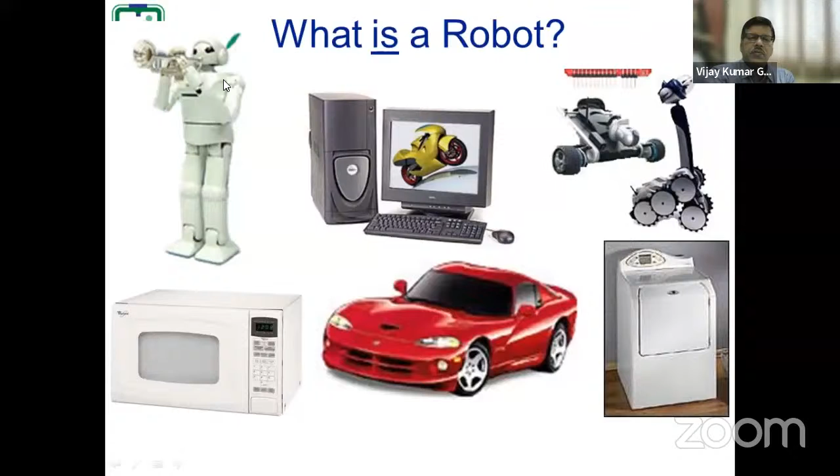So what is a robot? Basically, according to the Robot Institute of America, a robot was first defined in terms of the industrial manipulator. A robot, basically the industrial robot, is a reprogrammable multifunctional manipulator. So this definition has its focus on the manipulator.

But if we look at today's robotics world, the manipulator is a very small part, and robots have been developed in various other directions. But still the definition may be extended to the other robots. So this robot is reprogrammable. We need the robot to be able to perform different tasks. We should be able to reprogram it.

Maybe I have an arm which is working. For example, I've shown you this arm. I may be using it for pick and place: I pick something and I place it in another place. It can be used for writing on the board. It can also be used for welding. It can be used for painting, and many other tasks. So that means for every task we have to reprogram it. So we require a reprogrammable facility in the robot.

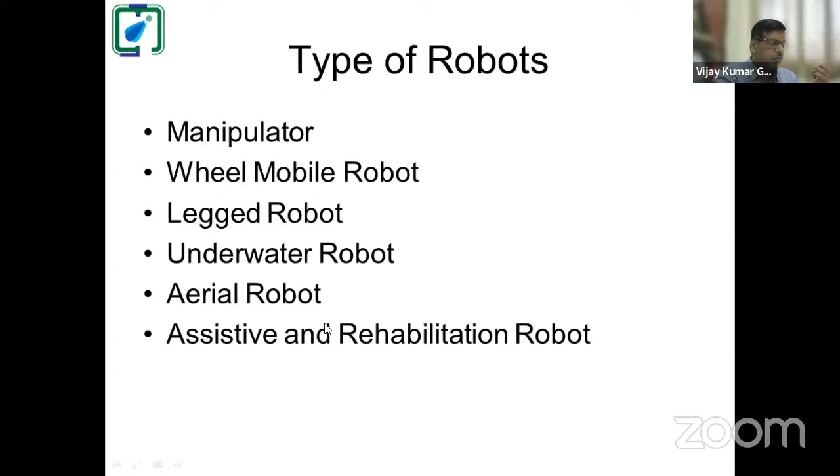Then what are the types of robots? I've just given you some indicative things, but we can have many more types. Basically, we can have the manipulator. You might have heard about the wheel mobile robots, the leg robots, underwater robots, aerial robots, or human-centric robots like assistive, rehabilitation, and other purpose.

So we can have the mobile robots. Mobile robots means robots that can move freely in their environment. So they can be either leg mobile robot or wheel mobile robot. We can divide it into two parts, right? Then we can subdivide it into the type of terrains, means whether they are moving inside an indoor room only, or they are moving outside the building, also outdoor robots.

Terrain robots, you might have seen that the Mars robot is moving in different types of terrain. So the Mars rover has been developed for different terrains. Terrain means that there is an interaction between the wheel and the soil, and the type of interaction may be different. Maybe the friction conditions are different, or there may be some other conditions which may be different. So we require different types of handling of the robots. Basically, the power requirement will be changing, or the balancing of the robots will be changing.

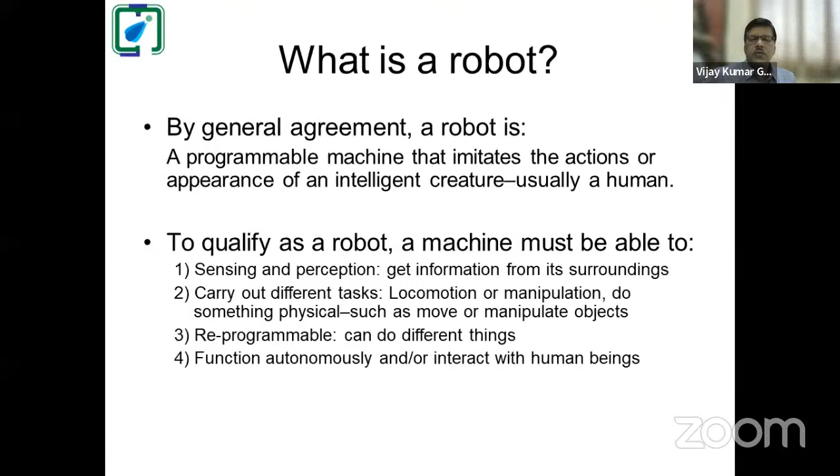The second type of robots are the manipulators. So we say that they are the robotic arms. Mostly they are stationary robots. So there is a base over which these robotic arms are placed. Now there may be some robots which can be moving also. Suppose I have a wheel mobile robot and I can place an arm over there, and then it can go to a certain place and carry out certain tasks.

Particularly when we have rescue operations, such types of robots may be useful because we have to move to the other place. We have to move in different terrains because there may be boulders, there may be some other type of terrains. So we have to move it, and then it is carrying the arm. Just like our scavengers, they will be removing the debris, and then they will be trying to identify the persons and other things, right? So we can have a combination of mobile and robotic arm also.

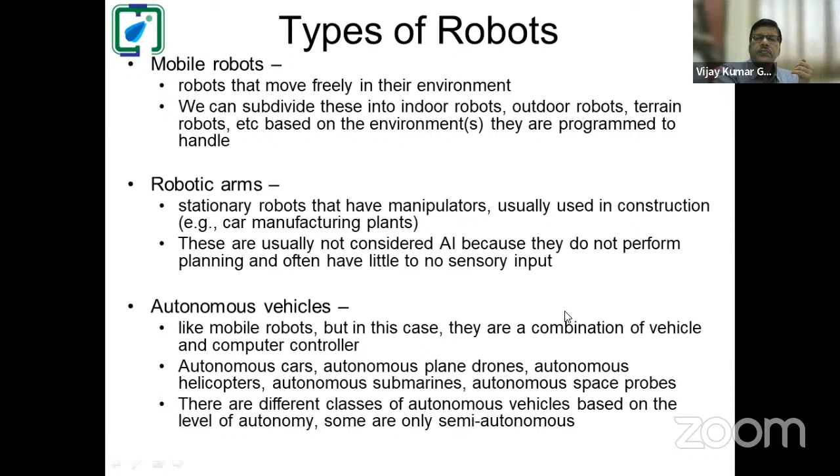Because with the human hand, when we are trying to pick something, we first determine whether we require a soft touch or a hard touch. If I want to pick up cotton, obviously I don't require much pressure. I have to pick it slightly. Only a small force will do the job. But if I have to pick up this remote, obviously I have to apply more pressure. So another direction soft robotics is going in is trying to mimic the skins of various creatures and then develop robots, right?

There are robots which learn by mimicking, like facial gestures or other types of learning, and they can be used. Another type is software agents. They work in the network, basically. This is another direction. It is not the hardware direction, only the software direction, where the bots, these software agents, move in the network. They try to determine where the problem in the network is, and they are used for other purposes.

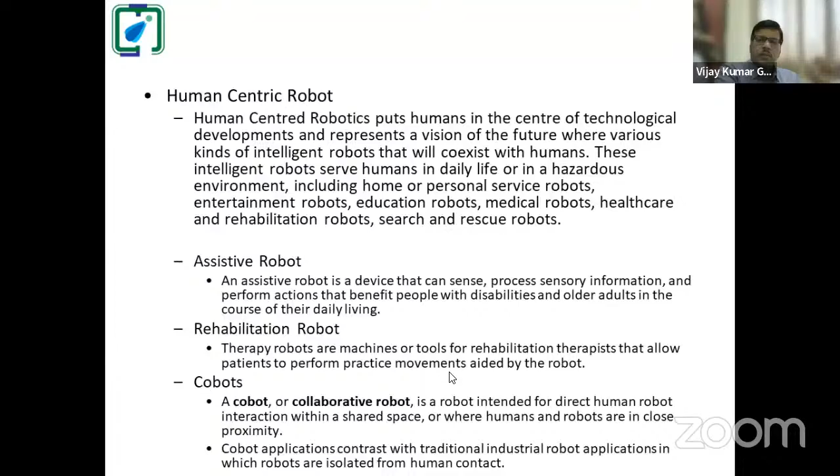And I already talked about the cobots. A cobot is a collaborative robot which works in collaboration with the human within a shared space. So these are some of the robots being developed in the world, right? So with this brief introduction about robotics, what I am trying to do is give you some small information related to manipulators and mobile robots.

Why I had chosen the manipulator for this is basically that the human arm or these therapist robots are being developed based on these robots. We can have robots which have an open chain, so they are serial manipulators, or there may be parallel manipulators, where the various actuators are in parallel to each other. So let us first take the manipulator.

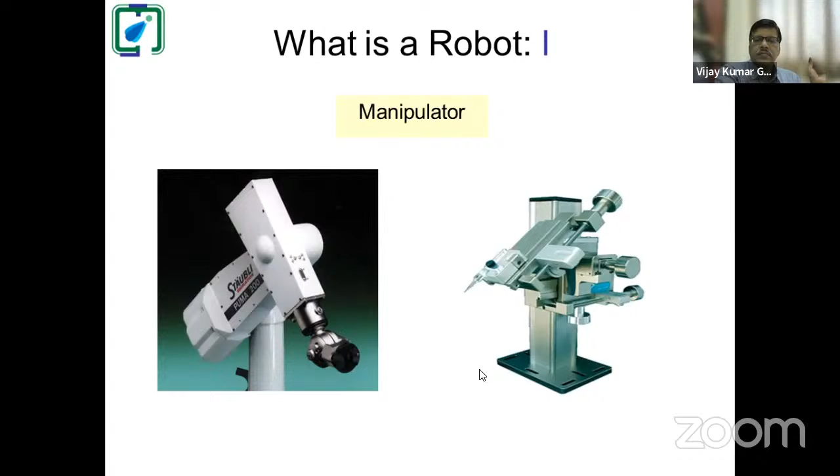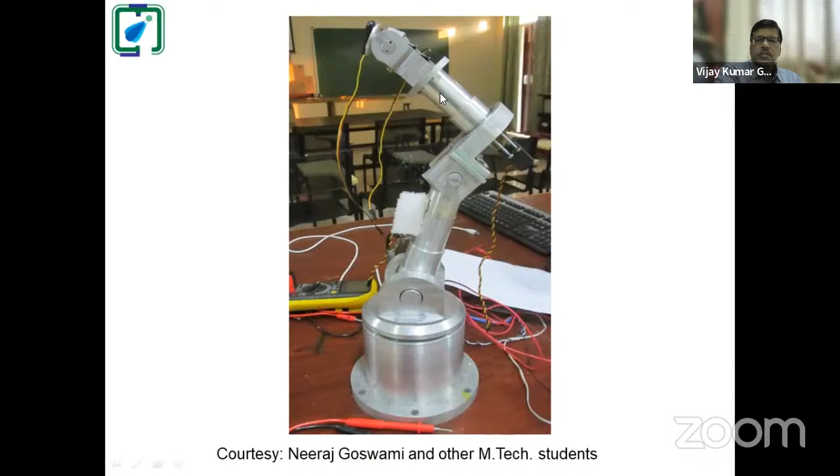This is the Puma 200 robot. I had already told that there is a shoulder joint, there is an elbow joint, and there is a wrist. What a human being can do is right there in this robot also. This is another robot which is developed for performing a specific task. In our lab also, we have tried to develop a robot manipulator like this, which is a 6 degree of freedom robot. So this is the arm, and these are the various joints.

So when we talk about the robot, the initial robots were based on the manipulator. Accordingly, the robot coordinates have been defined, and the robot classification. Now mobile and other robots have come, but still these definitions are told because these are the initial things. So we can have robots performing the operation just like a crane or gantry, where all the joints are prismatic joints. Manipulators either have prismatic joints or rotary joints.

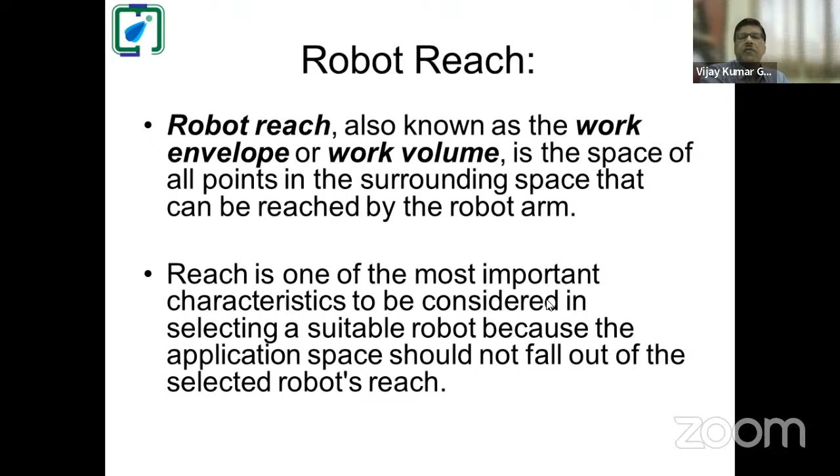Reach is one of the most important characteristics to consider in selecting a suitable robot, because until it can reach a particular point, we cannot perform that task. For different robot configurations: Cartesian, the reach is a rectangular space. Cylindrical, it is a hollow cylinder. Polar or spherical, it is a hollow sphere. And jointed arm configuration does not have a specific shape.

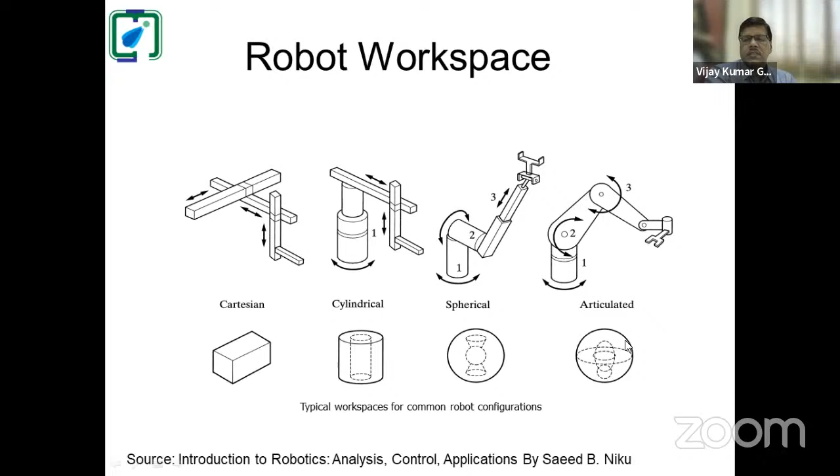This figure shows the robot workspace. This is the Cartesian workspace, this is the cylindrical workspace, this is the spherical workspace, and this is the articulated workspace.

When we discuss the manipulator, we discuss its kinematics, which can be divided into two parts: forward kinematics and inverse kinematics. This is one example of a manipulator. If I rotate it about this vertical axis, this point will move in this space. We know the trigonometric relations, so if I move by one angle, it moves by r cos theta and r sin theta. That gives me the new position based on theta.

But there is another degree of movement here; the robot can also move about this axis. Now it becomes a combination of two angles, theta and phi. If I have another one, psi, then I have a third degree of freedom. So given these joint movements, calculating the final position is given by forward kinematics. It is simple in 2D space, but in 3D space it becomes slightly difficult.

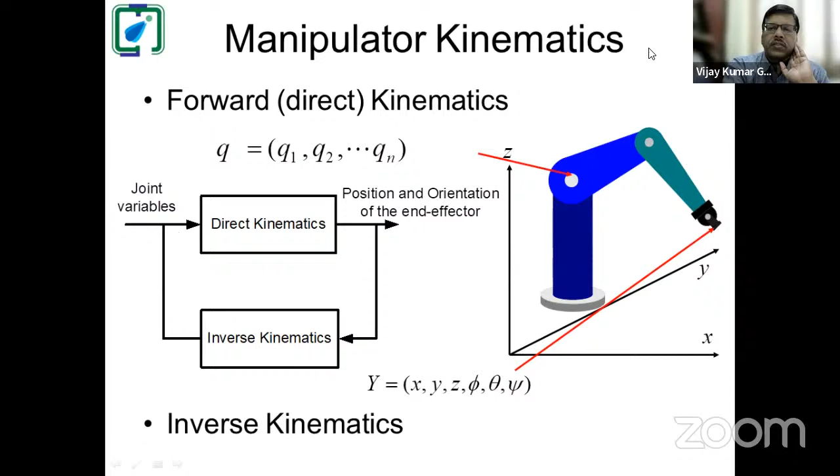Right? So just to brief, basically for forward kinematics, we use the Denavit-Hartenberg conventions. This convention is based on how the joints are joined together. So suppose I have this one link, this may be the other link, this joint may be in this direction and this joint may be in this direction. So what is the relationship as I move from this previous joint I-1 to the next joint I? What will be the relationship? Basically, we are moving along this.

So 4 parameters are being used for this purpose. They are given as A, alpha, D, and theta. So these 4 parameters define the movement, how from one axis to another axis I can move, or how from one link to another link I can move. There are basically 2 conventions for the Denavit-Hartenberg. One is the original Denavit-Hartenberg, and another is the modified Denavit-Hartenberg. So you have to be careful which one you are using. You cannot mix them together.

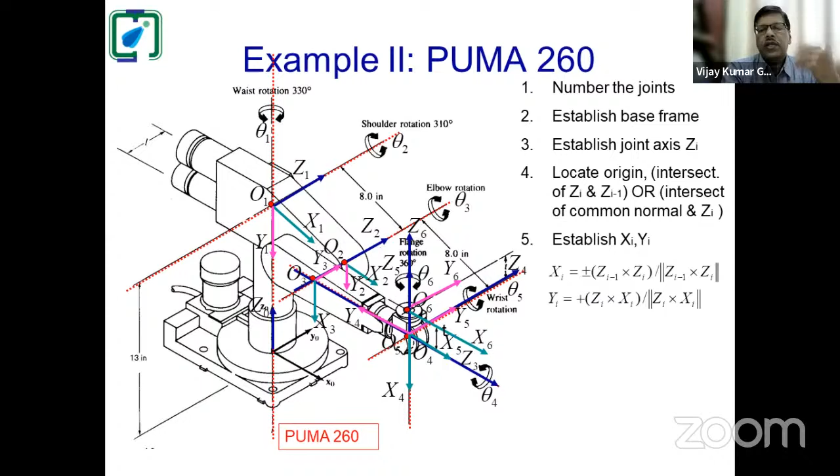Then we define the origins for different points. And once they are defined, we define the x-axis. So Z0 and Z1, perpendicular to both, x1 is defined, right? Then Z1 to Z2, as we move, the common perpendicular between the two will be the x2 axis. And likewise, you will be defining x3, x4, x5, x6. There is no need to consider the y-axis because the Denavit-Hartenberg rule does not incorporate the y parameters. So that becomes sometimes problematic actually.

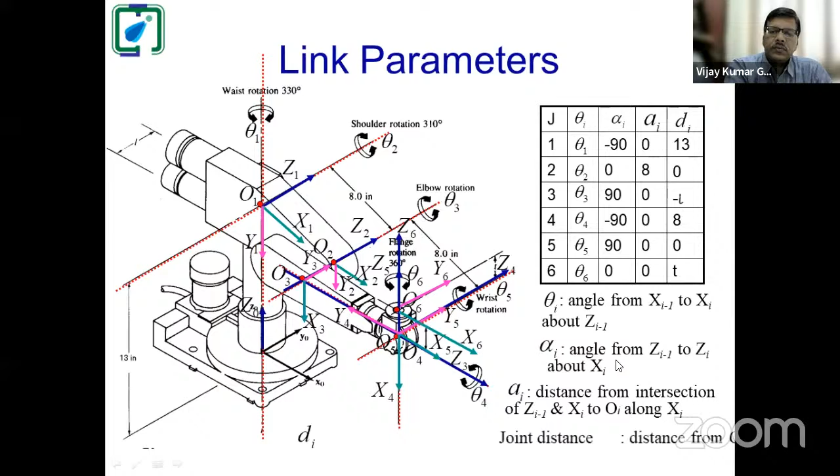So based on the Denavit-Hartenberg rules, this is the table which has been formed. It contains the 4 parameters theta, alpha, A, and D. In the conventional or original DH rule, theta and D are defined about the previous axis, I-1 axis, and alpha and A are defined about the new x-axis. While in the modified convention, alpha and A are defined about the previous x-axis, and theta and D are defined along the next Z axis. So this was just a brief of the forward kinematics.

In inverse kinematics, we try to identify what will be the movements, because when we try to move the robot from this place to this place, what will be the movement of the different joints? What will be the rotations? So for joint variables which can bring the robot to the desired configuration, inverse kinematics plays a role. But remember, inverse kinematics is slightly tricky because it gives you multiple answers. Even if I consider that only one link is moving, you may get 2 values of theta if theta is positive. If theta is negative, you will again have 2 values for theta. So with more axes, you will be getting multiple answers, and you have to choose the one which is best fitted.

There are techniques available for carrying out the inverse kinematics. I am not discussing that because it requires sufficient time.

Then the third thing which comes is the velocity kinematics, because when we move with the manipulators, the rotational speed or the speed of the end effector along different directions will be important. So velocity kinematics gives the relationship between the joint space velocity and task space. So these are the movement of the different axes velocities. Suppose first axis is moving with theta 1 dot, second axis is moving with theta 2 dot angular velocity, and

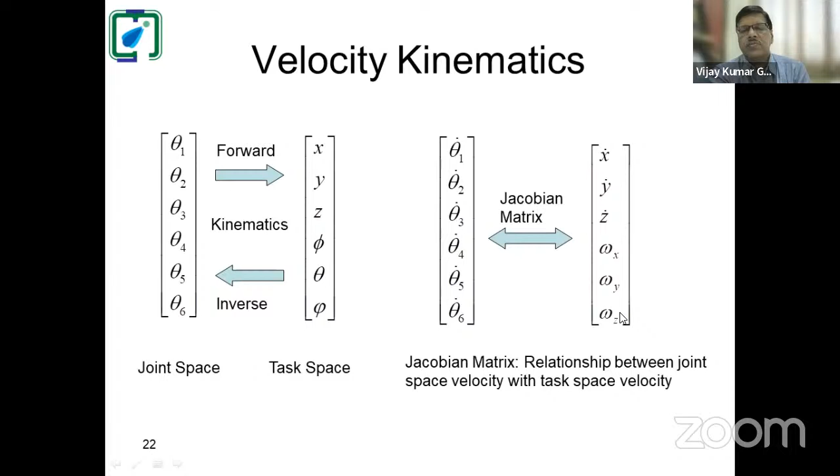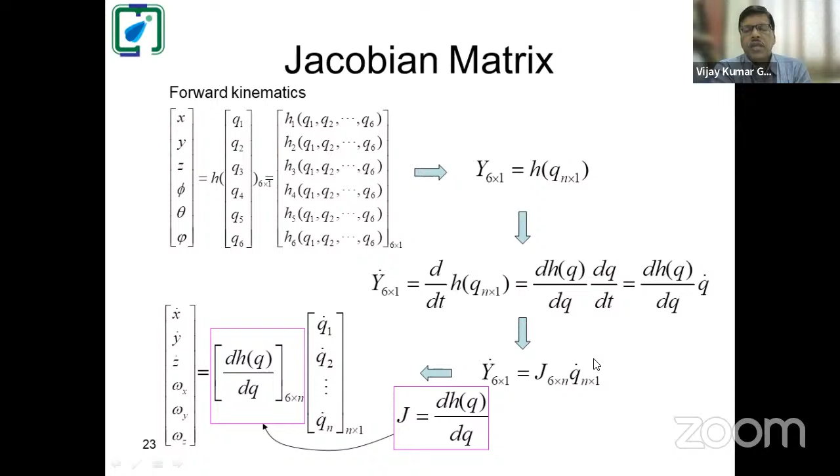likewise others. So what will be the velocity of the end effector along x-axis, along y-axis, along z-axis, or rotation about x-axis, rotational speed about y-axis, and rotational speed about z-axis. So this is how the Jacobian is defined. Again, I am not going into much details of that, but you get the matrix like this, and that gives you the relationship basically.

So that covers the forward kinematics, inverse kinematics, and this velocity kinematics. In addition, we perform the dynamics of the robot, in which we try to identify what will be the motor capacity, how to determine that the particular motor will be able to sustain the particular load. For example, suppose I am picking again this remote. It is having its weight. Maybe it is 100 gram or 150 gram or 200 gram. So when I pick it, I need to apply sufficient force or sufficient torque so that I will be able to pick it.

So when we are designing the robot or manipulator, even in the wheel mobile robot also, we have to identify what type of motor is needed, what will be the torque capacity of that, and accordingly we have to work on the design of the robot. Right? So that is the dynamics of the robot. So this was a brief introduction about the manipulators basically. Now let us move towards the mobile robot, some introduction to the mobile robots also.

So mobile robots, you can divide into two parts. One is the wheel mobile robot, another is the leg mobile robot. If we compare these mobile robots with the industrial robots, or the manipulator, generally the manipulator will be an open kinematic chain with the end effector. We have the base, and from base to the hand, this is not connected to any other part. So it is an open chain. While a wheel robot is a closed multiple chain because all the wheels are connected with each other through the ground. They are on the ground.

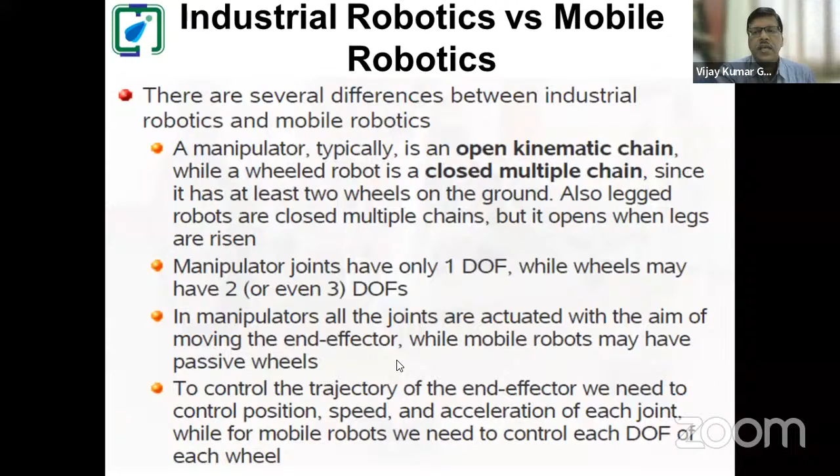So we use the numerical methods to solve such type of problems. It becomes more and more complex as the degree of freedom and complexity increases. So that is right. I will come back to this slightly later, or I will share some examples of this. Okay. So now we move forward.

I was just discussing the mobile robots, so how the mobile robots have been developed. If we see the creatures in the real world, they are moving. So there is a movement due to rotation. Wheels are the examples of that. So we can have the wheeled mobile robots. There may be a conveyor belt.

So tracked wheel mobile robots have been developed, particularly when the terrain is quite difficult; in that case, tracked wheels are better. Even if you go into the hilly areas during the snowfall, they use the tracked wheel base, right? And our armies anyway are using this tracked wheel. So conveyor is there. We can walk, we can swim.

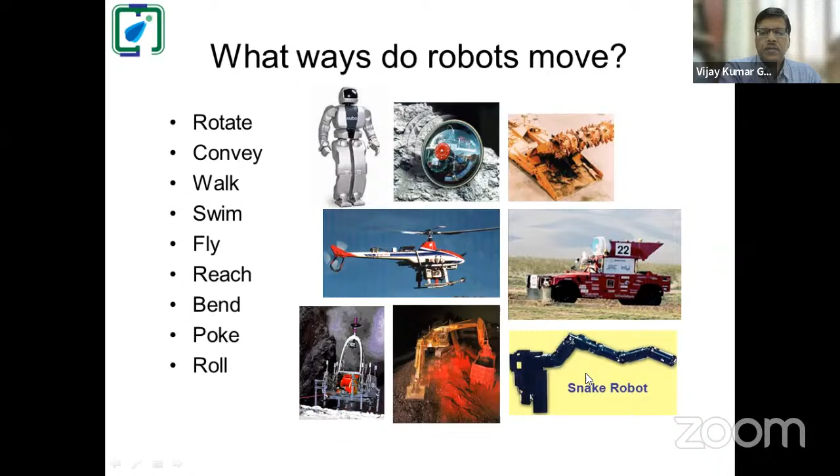So same thing has been tried to replicate in the robots. Fly, reach to a particular place, bend. Snake type of robots will be bending and then crawling, poking, rolling, right? So we can use the legs. They can be used for walking, crawling, climbing, jumping, and hopping. Wheels are used for rolling.

We can use the arms for swinging purpose. We can use them for crawling and climbing. This is one example. Arms are being used for moving, right? Then flippers can be used for swimming. And there are many other biological examples, right? And these become the effectors.

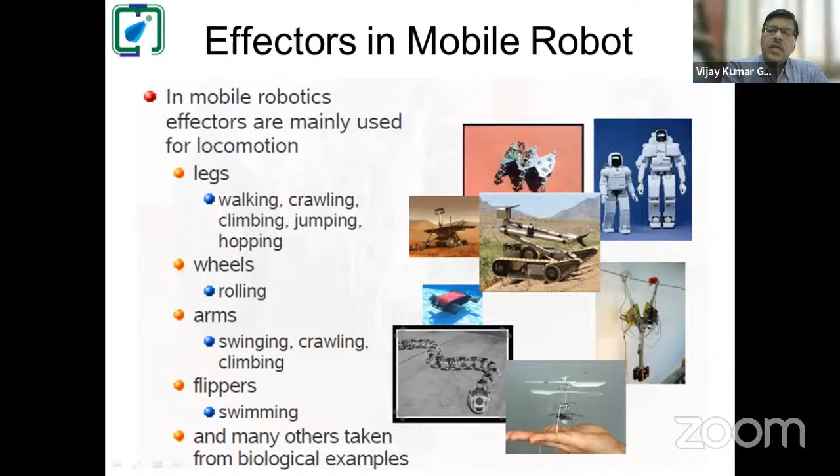So leg is one effector. If we see the leg, it is just a manipulator. If we invert the manipulator, it is a leg, right? Wheels, we use the motors. Arms and legs are a similar type. Flippers require an action like this so that swimming becomes easy. It can be this movement or different combinations. So by analyzing the movement of the creatures in the world, they have been designed by various researchers, right?

So if we talk about the legged robot, we have the locomotion. The basic purpose of the locomotion is to move the robot around. So the robot is performing two tasks. One, it is moving around, and then it is performing some other tasks. To move other objects around, that is manipulation. So for wheeled mobile robots we are just considering locomotion, and manipulators we had already discussed, right? So this I had already covered.

While most animals use legs to get around, legged locomotion is a very difficult robotic problem as compared to wheeled locomotion.

The main problem is balancing. As human beings, we are able to easily stand still. We can walk or we can just stay at a place. But if you see, when we are standing at a place, after some time we have to change our posture, right? Because we tend to get instability.

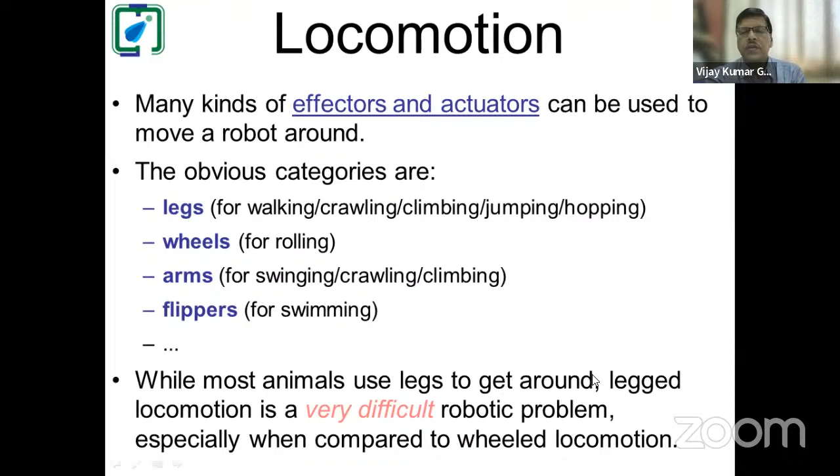So we have to change the posture, and again we stand. Basically, we keep on standing, but our posture will be continuously changing. So in robots also, it is needed that they should be stable. So it is like that, right?

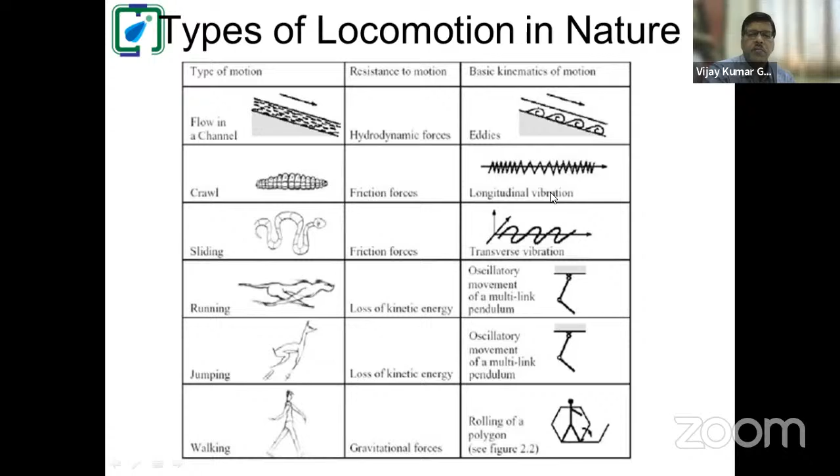So these are the types of locomotion in nature, and the kinematics of the motion explored by the researchers is like this. These basic mechanics principles have been used by the researchers to design robots like this. So for crawling, just like the inchworm, we can create longitudinal vibrations in the robot, and then it can move. For sliding, we require transverse vibrations, and like that, right?

So I had already discussed that for locomotion, any robot needs to be stable. We talk about two types of stability. One is static stability, meaning it just stands still without falling over. In dynamic stability, it is moving. And if you see, when you might have started riding the bicycle, static stability is difficult as compared to dynamic stability. Right?

So for static stability, we require enough legs or wheels on the robot to provide sufficient static points of support. When we are talking about mobile robots or legged robots, we ask what is the point of support, right? As a human being, when we stand still at a particular place, we have our legs. So if I draw them, I have this foot on the ground, this foot on the ground, and between them, they become the point of support.

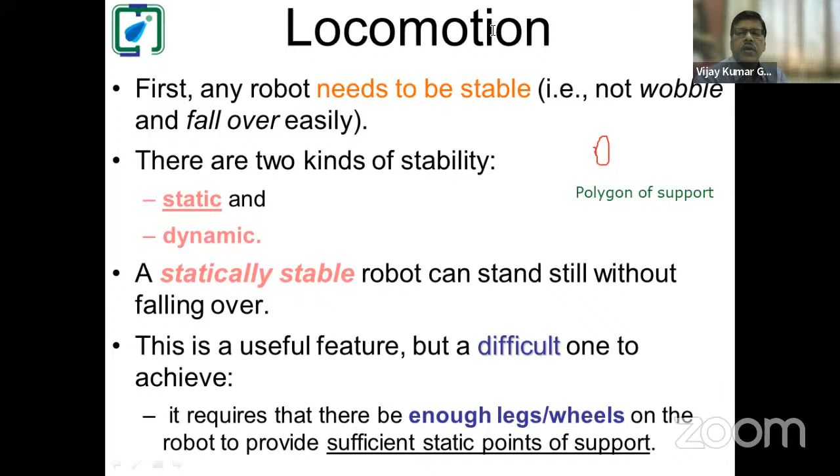Instead of point of support, because there are a number of points in this support, it is better to call it the polygon of support. So for static stability, our CG should always be within the polygon of support. That is the basic requirement. Obviously, when we have more legs, static stability becomes quite simple. Center of gravity must fall within the polygon of support.

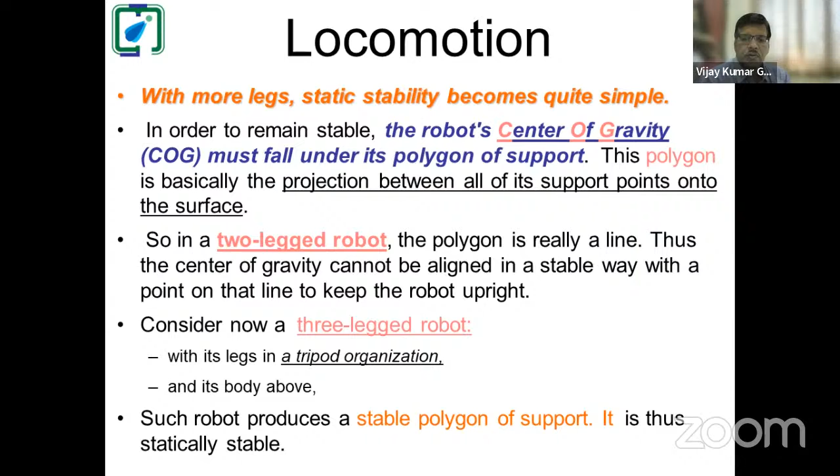So at least 3 legs are considered to be more stable because they make a tripod. A tripod is always stable as compared to the biped condition, with 2 legs on the ground. Okay. We require a minimum of 2 degrees of freedom to move a leg forward. We have to lift and we have to perform a swinging operation.

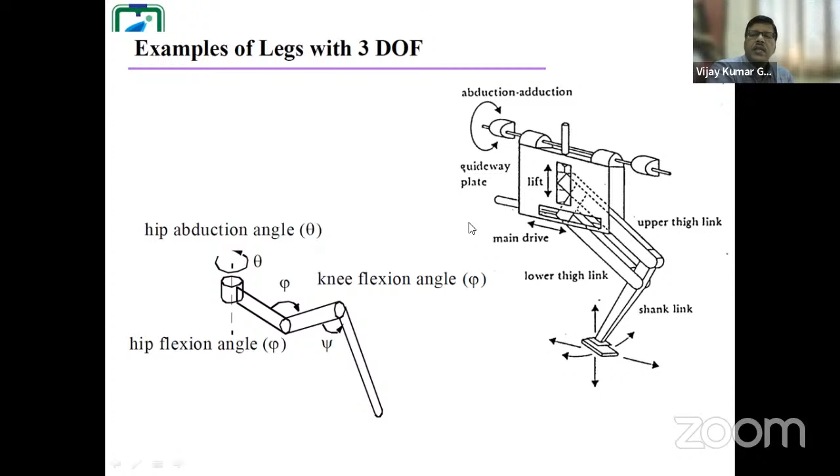3 degrees of freedom are required for each leg in most cases. And if we have a 4th degree of freedom for ankle support, it may improve the walking. But with 4 degrees of freedom, we increase the complexity of the design. Each leg can be considered as a manipulator. This is one example of leg support; you can see it is just like a manipulator. We have abduction, adduction, and guideway. Right?

Coming to wheeled mobile robots, we normally see them. A wheel assembly is required. Most robots use wheels for locomotion because of the simplicity of control and stability. Right? But if we see, animals do not have wheels; they have legs. Because nature has given animals stable performance, they can balance their body. That intelligence is already built into the animals.

With a legged robot, obviously we can overcome a number of obstacles. So for obstacle avoidance and other purposes, legged robots are considered better as compared to wheeled mobile robots. But if we require speed, wheeled mobile robots will have more speed as compared to legged mobile robots.

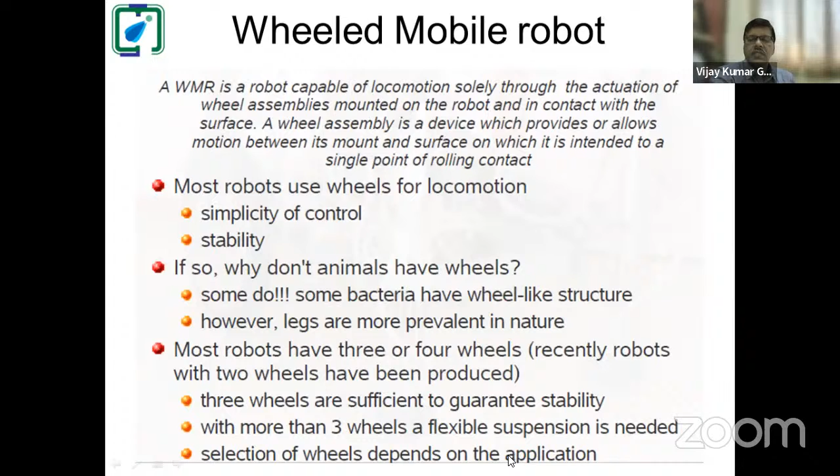So most robots have 3 to 4 wheels. 3 wheels are sufficient to guarantee the stability. With more than 3 wheels, a flexible suspension is needed. So it depends upon the type of applications.

So there are 4 basic types of wheels. Standard wheels we normally use. So there is a hinge here, and then it is wheels. Right? Castor wheels, which we use in our chairs. So there, the third wheel is automatically aligned. Right? It is just given this type of shape, so it is mostly aligned.

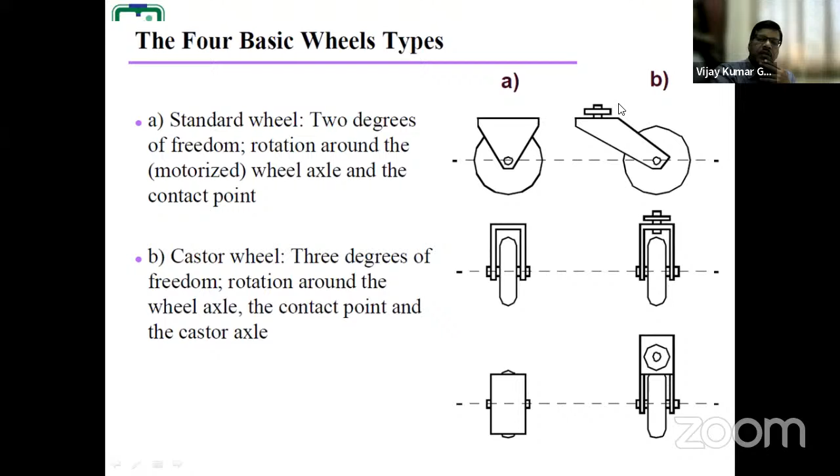Right? Then we have the Swedish wheel, which is having 3 degrees. Can rotate about their own axis. Around the rollers they can rotate, and then around the contact point they can move. We say that they are the omnidirectional wheels like this. Right? Swedish wheel with 45 degree, it is now known as the omnidirectional wheel. And instead of this wheel like this, you can have a roller here, then that becomes the ball or spherical wheels.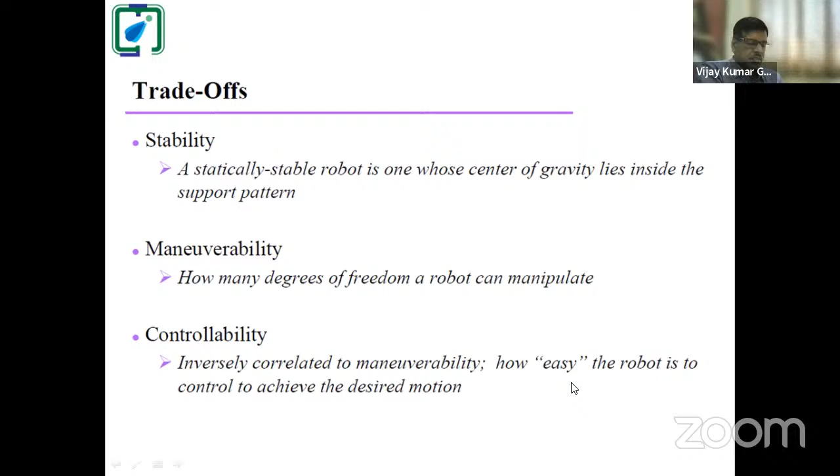The biggest advantage with the omnidirectional or Swedish wheel is that I can move this vehicle along the left direction, right direction, or I can move it front or back directions without any movement in the other directions. So that advantage we are having with this. Right? So basically, we have to have a trade-off between the stability, maneuverability, and controllability. Maneuverability means how many degrees of freedom a robot can manipulate at a time. Controllability means how many degrees we can control. Right?

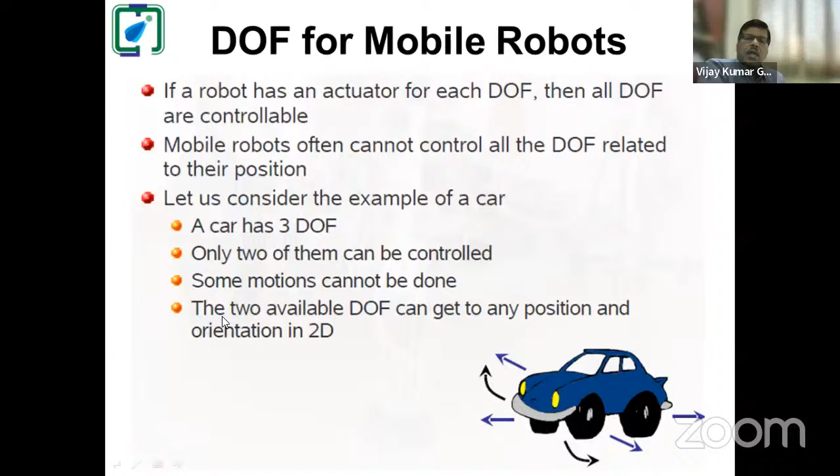For example, suppose this mobile robot, if we consider this car, it is having 3 degrees of freedom. It can move along front direction, it can move sideways, or it can steer. Right? But out of these 3, I can control only 2. One is the movement of these wheels, another is the steering. Right? So it is having 3 degrees of freedom, but we can use only 2. So that means some motion cannot be done, sideways motion cannot be done. Suppose I require this sideways motion, I have to take the car front and back a number of times, and then I can place it on the side. The 2 available degrees of freedom can get to any position and orientation in 2D.

So when we talk about the wheeled mobile robot, holonomicity is required. Holonomicity means whether the robot is holonomic or non-holonomic. If the number of controllable degrees of freedom is equal to the number of degrees of freedom of the robot, it is a holonomic robot. But if the number of controllable degrees of freedom is less than the number of degrees of freedom of the robot, it is a non-holonomic robot. And if the number of controllable degrees of freedom is larger than the number of degrees of freedom of the robot, it is a redundant robot. So a car is a non-holonomic robot, a human arm with more degrees of freedom, 7 degrees of freedom, is a redundant system, right? So I can skip this.

Another term which is generally used in the wheeled mobile robot is the maneuverability. It is basically the combination of the mobility available based on the sliding constraints and additional freedom contributed by the steering. So basically, we can say that degree of mobility is delta m, small m, remember here. Degree of steerability is suppose delta s. Then degree of robot maneuverability is delta capital M, that is equal to degree of mobility plus degree of steerability.

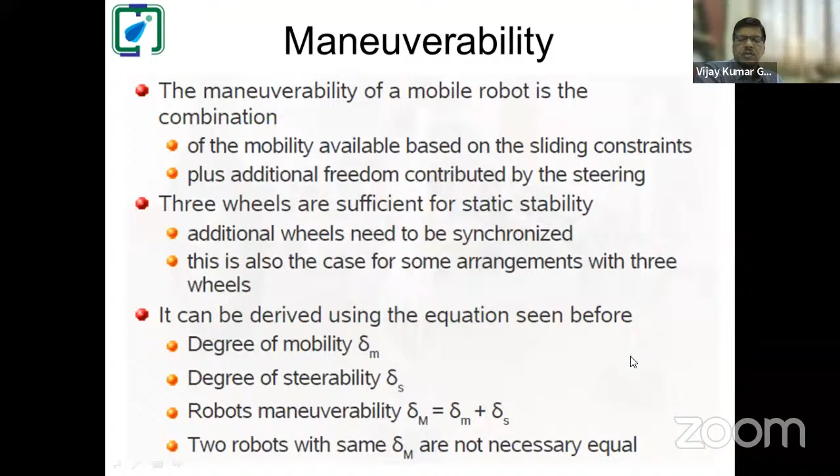I'm always inspired by Boston Dynamics actually. So I wanted to show you some video. Let me just play the video. I have, I think, 10 minutes time. So just.

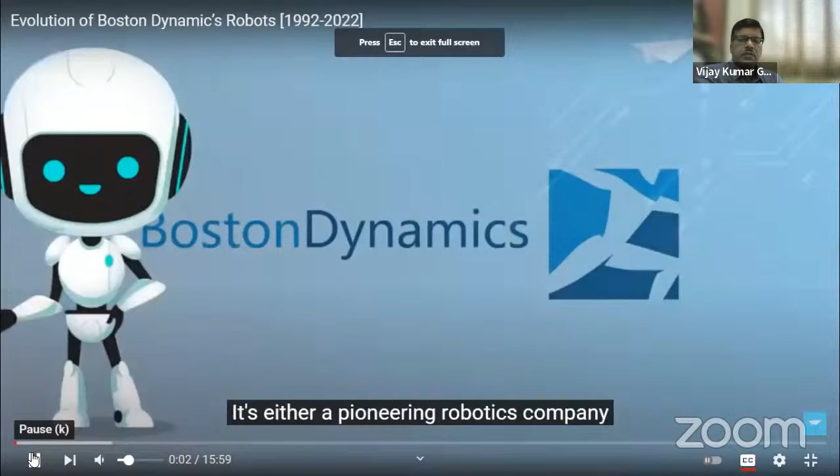So, Boston Dynamics, a pioneering robotics company helping to lead in a technological revolution, or a sign of the coming robot apocalypse? Over the last decade, Boston Dynamics has built some of the most impressive robots in the world that can run, jump, and even dance better than some of us humans. You can see this robot, it can move just like a human being on various types of terrain.

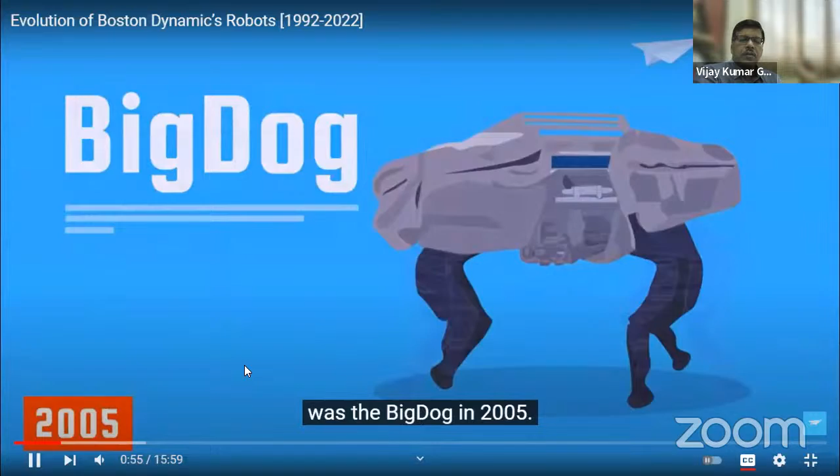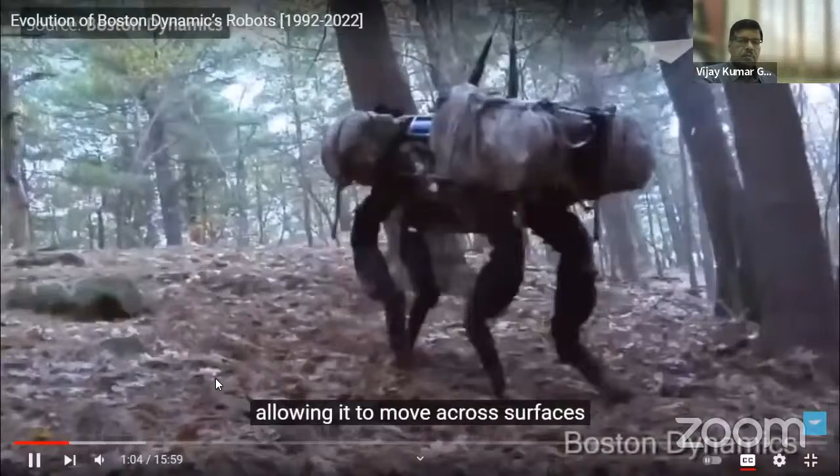One of the first Boston Dynamics robots was the Big Dog in 2005. The robot was designed to be able to carry heavy gear for soldiers in terrains too rough for vehicles. Instead of wheels, it had 4 legs, allowing it to move across surfaces that would defeat wheels. Big Dog was 3 feet long and stood 2.5 feet tall, making it about the size of a small mule.

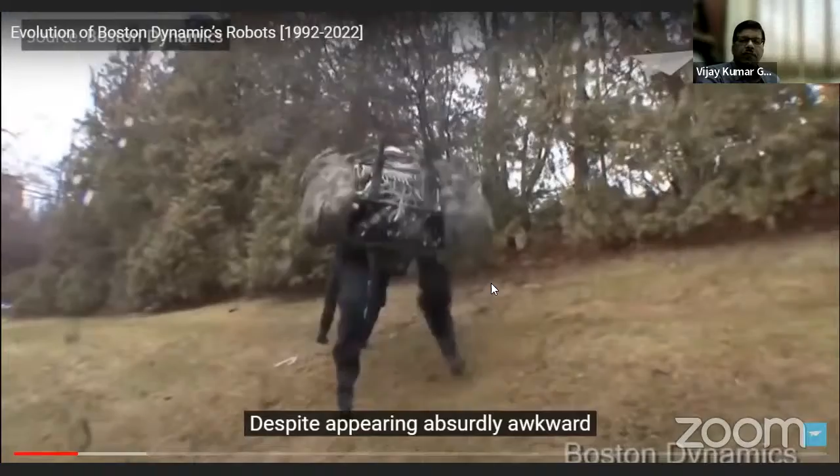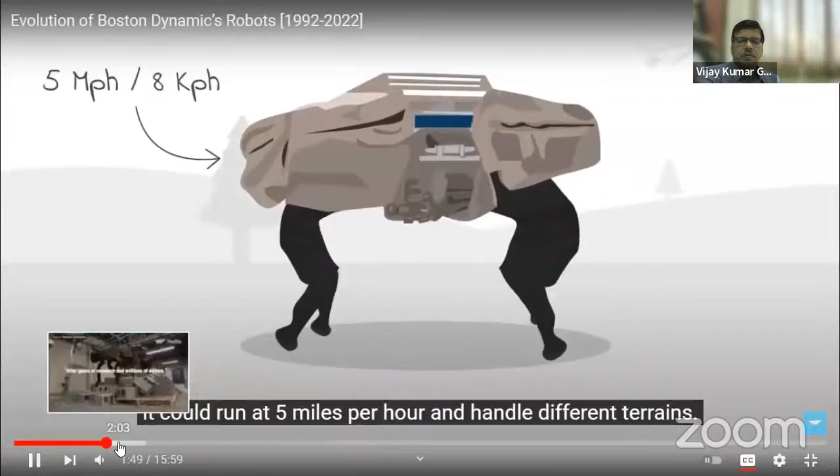The awkward and early videos of Big Dog were posted first on the Boston Dynamics YouTube channel. The robot was surprisingly proficient at keeping its legs under itself. Even when it was kicked by its tester, the Big Dog did not fall. In 2010, Big Dog was improved. It could run at 5 miles per hour and accurately reproduce two drunken men carrying a sofa.

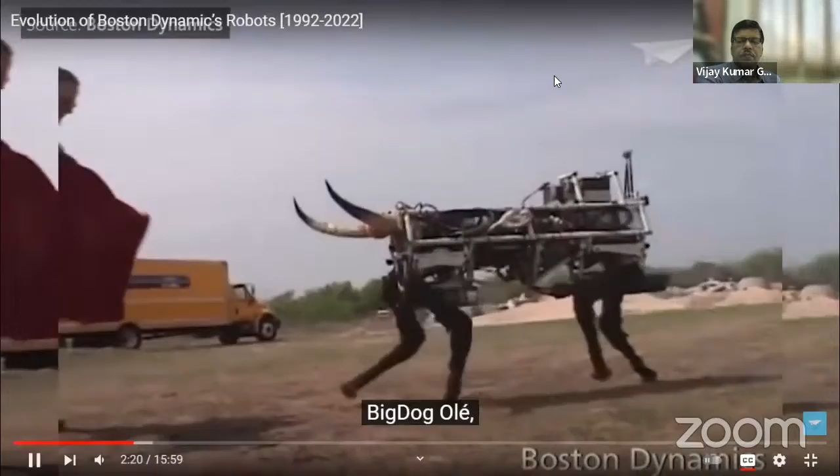Little Dog, which just looks like a legged Wi-Fi router. BigDog Olé, which hopefully one day can replace the tortured bulls in Spain. The Christmas versions of Big Dog are putting reindeer out of their jobs. Plot twist: the woman is a robot.

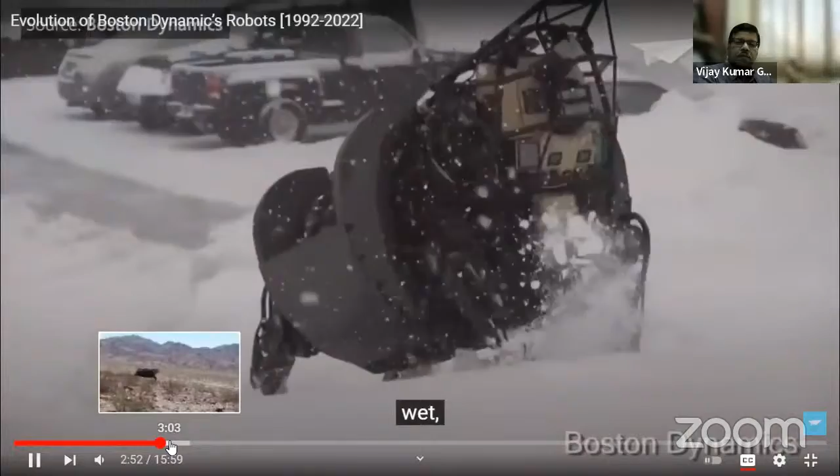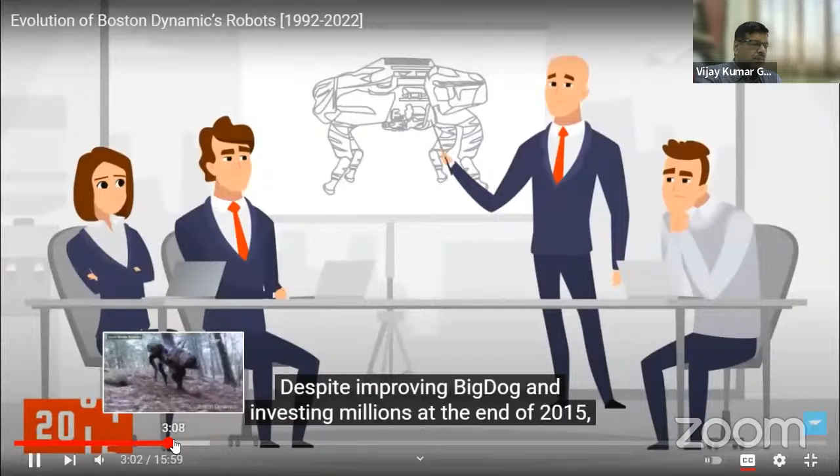In 2012, the latest generation known as the Legged Squad Support System, or LS3, was developed. It was a significant upgrade compared to Big Dog and could operate in hot, cold, wet, and dirty environments. It could also run faster at 7 miles per hour and was roughly 10 times quieter. Despite improving Big Dog and investing millions, at the end of 2015 the Big Dog project was discontinued. It showed the world how robots could take over the world by throwing bricks at humans.

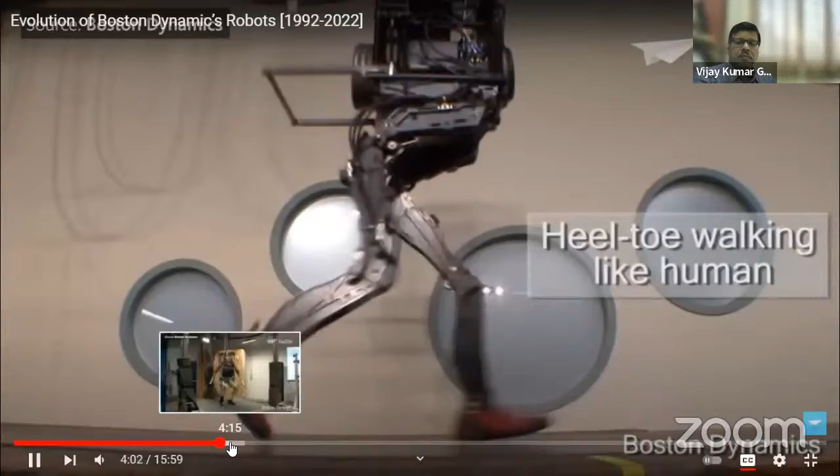In 2009, Boston Dynamics started working on a human-like robot named Petman. The robot can walk at 3.2 miles per hour. It was developed for the U.S. Army, who planned to use the robot to test protective clothing, and it could regulate temperature and sweat.

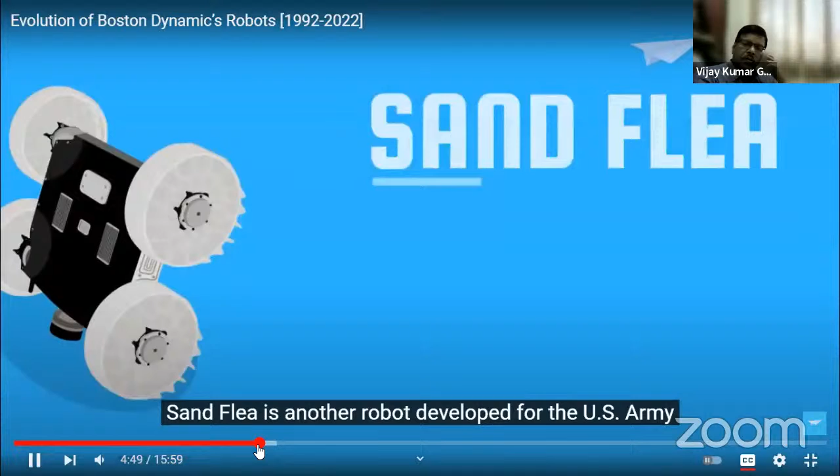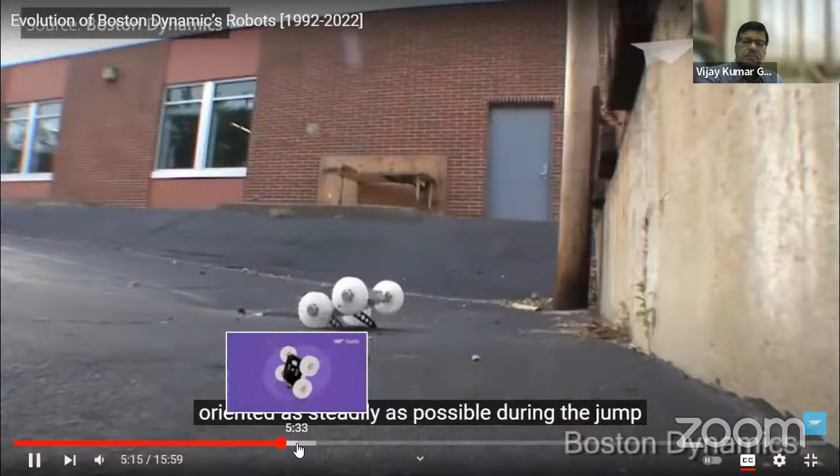Sand Flea is another robot developed for the U.S. Army, and it has no trouble jumping over a 2-story building. The piston is powered by CO2 and can make 30 jumps in a row before running out of power. Sand Flea was designed as handy surveillance in places that would otherwise be inaccessible or too dangerous for humans. The tricky part was keeping Sand Flea oriented as steadily as possible during the jump, since it was also intended to record videos while in midair. The navigational system is so specific that soldiers can even direct the Sand Flea to jump 2 stories into an open window.

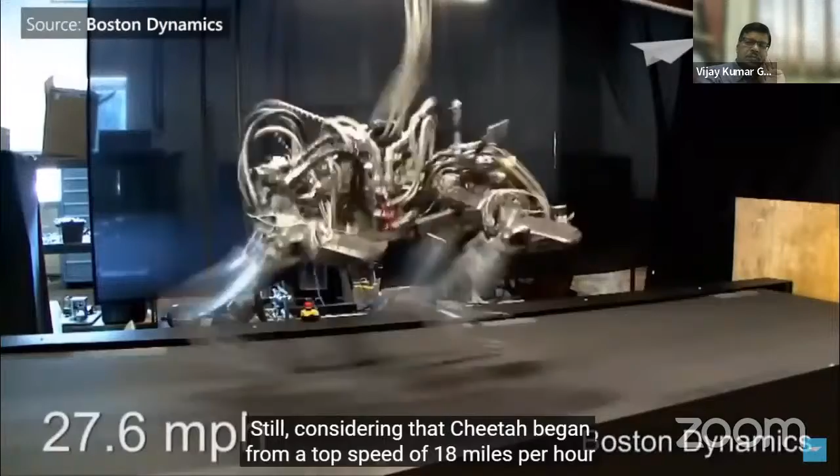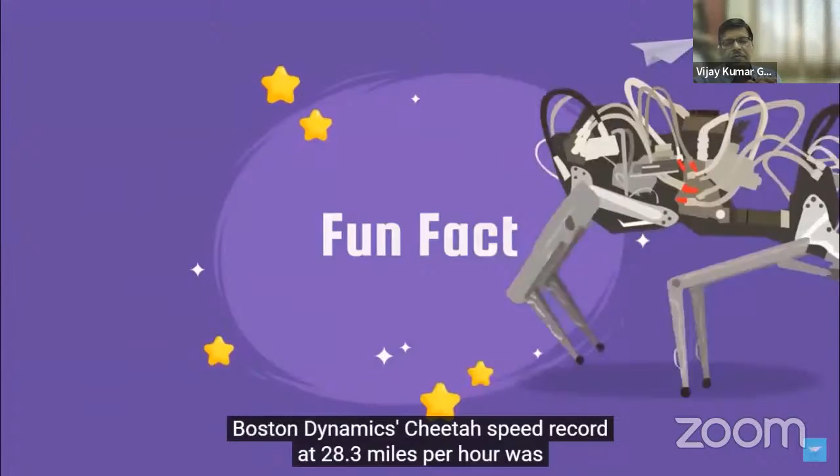We know Boston Dynamics had their eye on 50 miles per hour for a bit, and the top speed of a biological cheetah, around 70 miles per hour, may ultimately be within reach. We're not sure when this will be, considering that Cheetah began from a top speed of 18 miles per hour and came to 28 miles per hour in less than 5 months. Fun fact, the Boston Dynamics Cheetah speed record of 28.3 miles per hour was faster than Olympic champion Usain Bolt's 100-meter world record. Wildcat was a 4-legged robot developed in 2013.

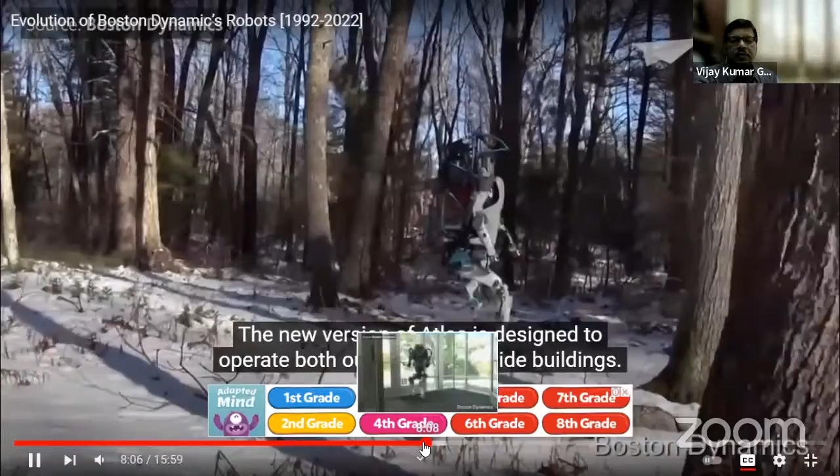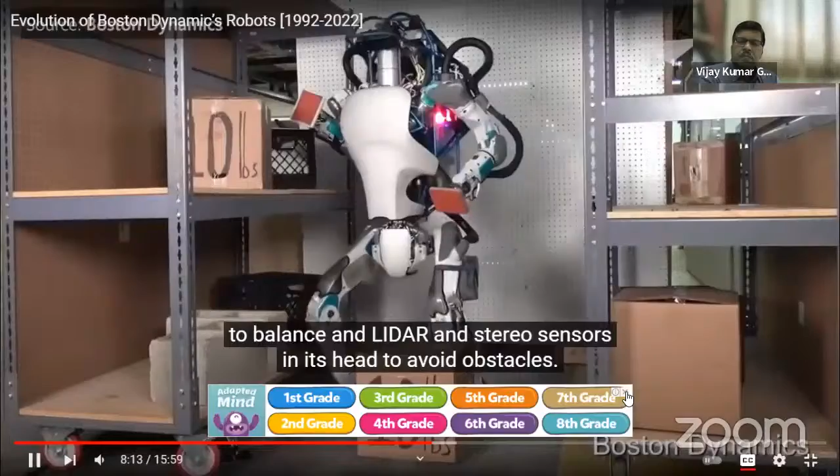Atlas initially stood 6 feet 2 inches tall and weighed 330 pounds, developed for DARPA. In 2016, Atlas received a new design with a height of about 5 feet tall. The new version of Atlas is designed to operate both outdoors and inside buildings. It uses sensors in its body and legs to balance and LiDAR and stereo sensors in its head to avoid obstacles. Sadly, Atlas was heavily bullied and cyberbullying was taken to a whole other level.

In 2017, Atlas was improved even further so that it was able to jump, but also, more impressively, it could do a backflip. With the next generation in 2018, Atlas could run outdoors. Now he could finally escape from the physical abuse in the lab. I hope he's fine.

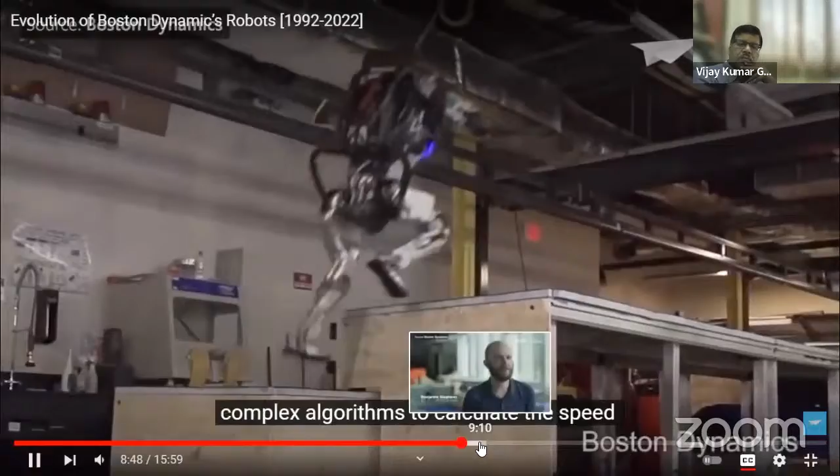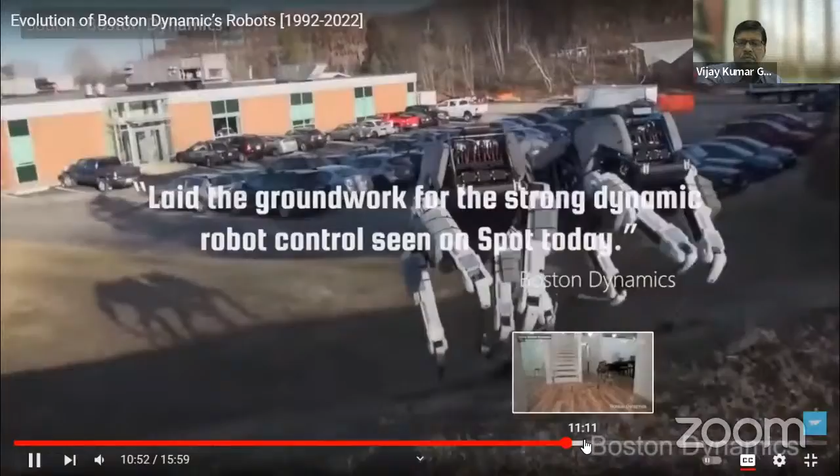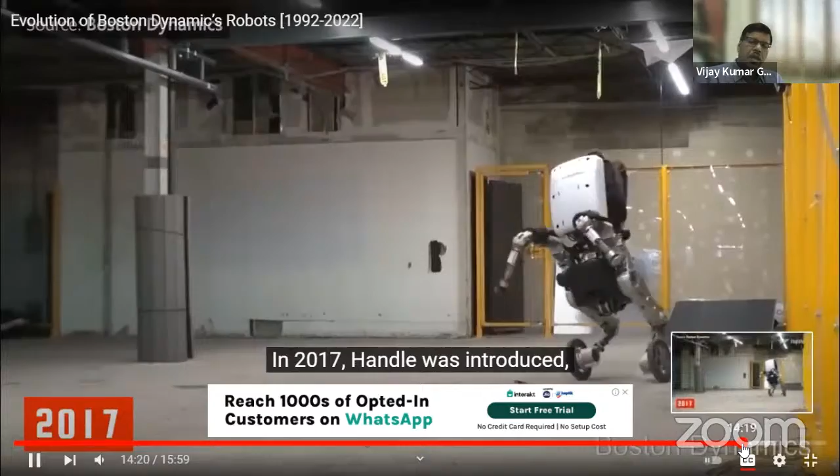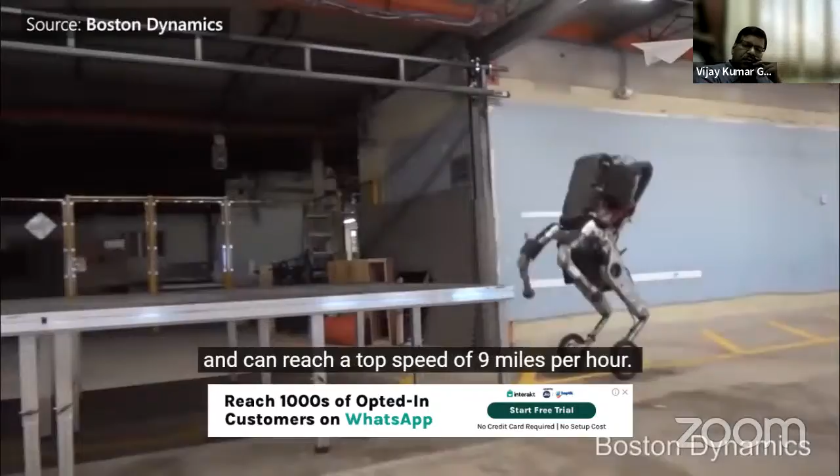In 2017, Handle was introduced, which the company has declared as, quote, a research venture into wheeled robots. The wheeled robot stands 6.5 feet tall and can reach a top speed of 9 miles per hour. So it was a combination of leg and wheel, designed for logistics tasks like picking up boxes to depalletize fast and accurately.

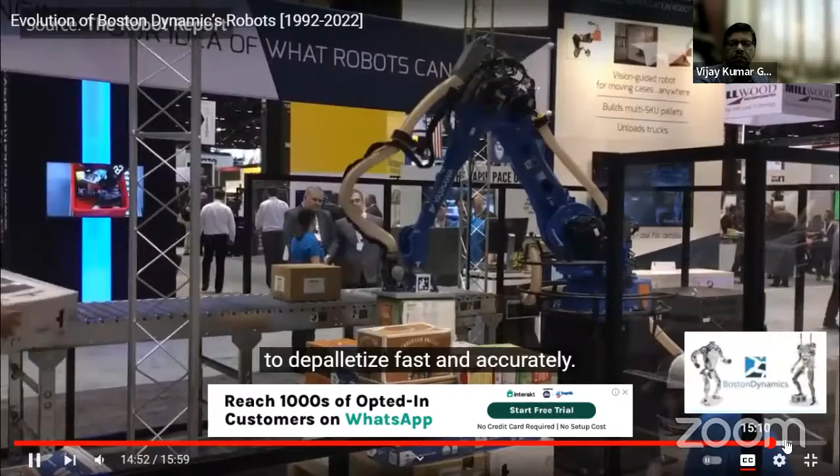The second is Stretch. Stretch is a versatile mobile robot that can unload trucks and build pallets. These robots can work autonomously. Meanwhile, warehouse workers watching this are getting stressed. It is unbelievable how far Boston Dynamics has come. So I stop at this point, and then I wanted to show you another video.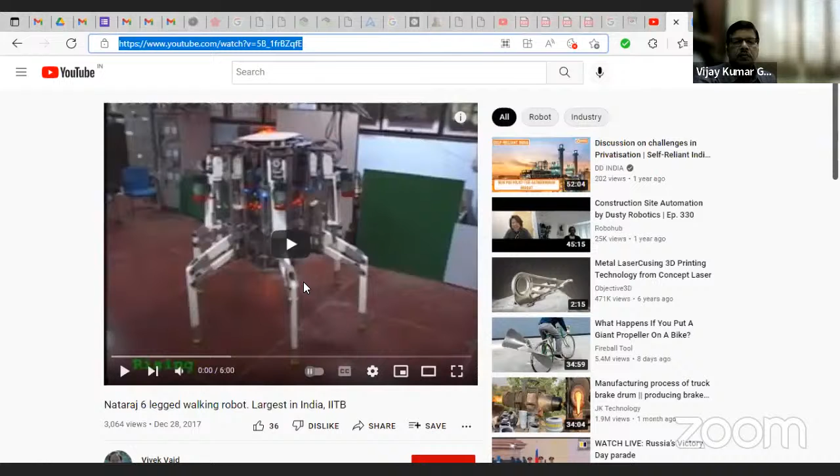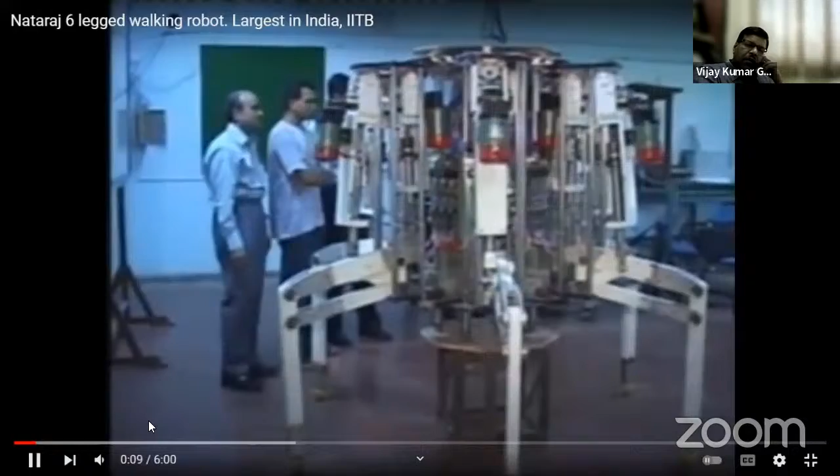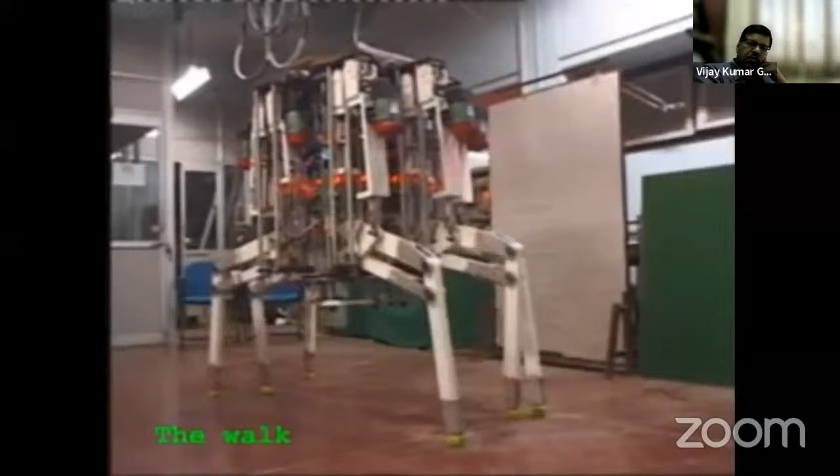So this is the robot being developed by IIT Bombay, actually. It is a 6-leg robot, and you can see the structure, very heavy structure it has been built with. It can walk. So it is a hexapod configuration, and you can see that 3 legs will always be on the ground to make it stable.

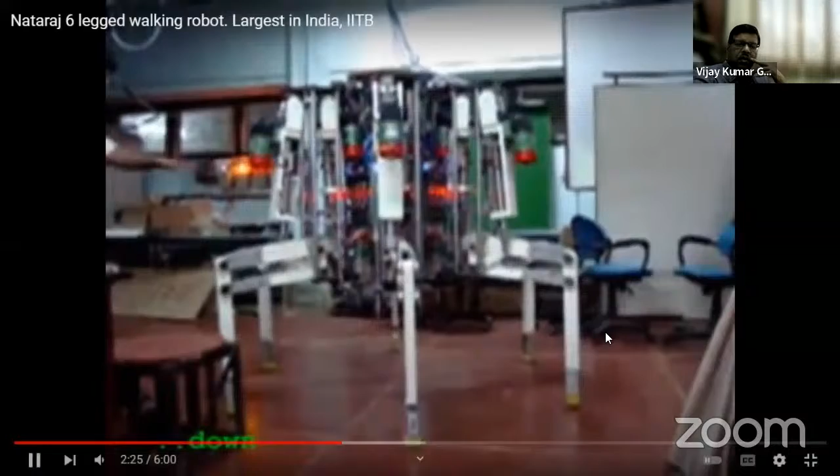This is the one. The speed which is shown here is 1/3 of the maximum speed. Then it was taking a turn. So when it is taking the turn, it is rearranging the legs. It is moving up and down. It can perform that type of task, just like a push-up.

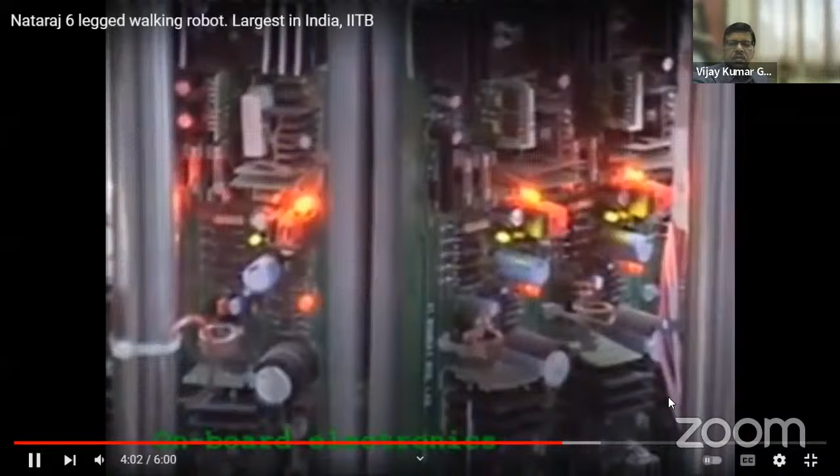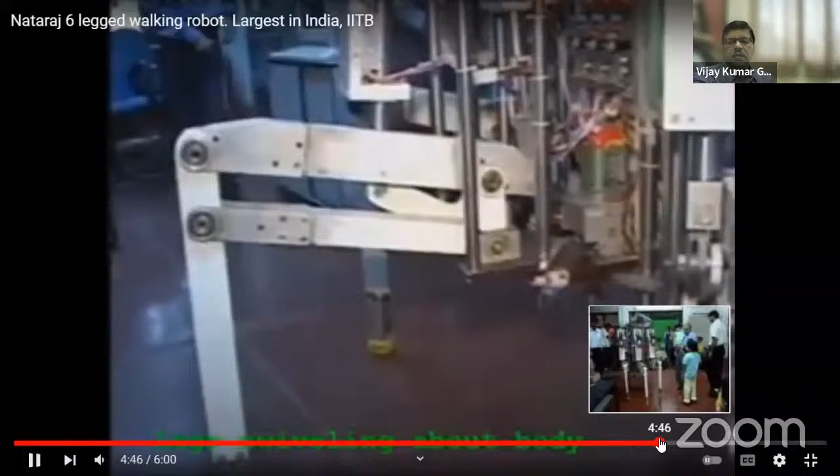It can rearrange the legs and then move towards the target. At that time, whatever electronics were available were used, and it was servo drive based. So these were some videos I wanted to show. Let me go on.

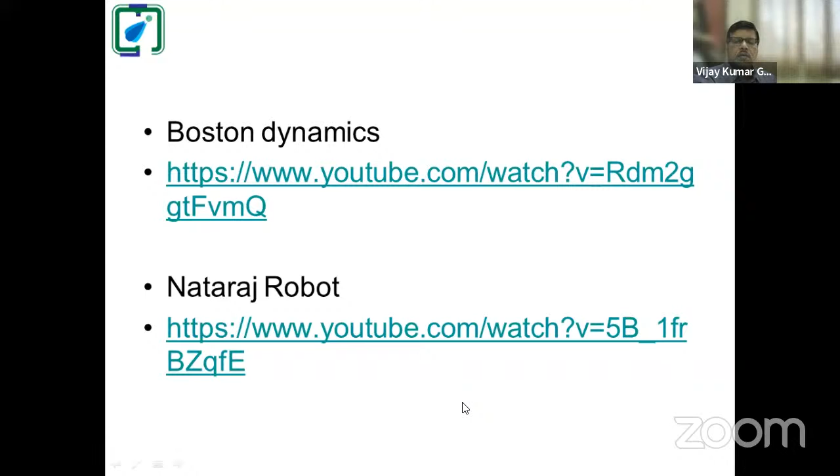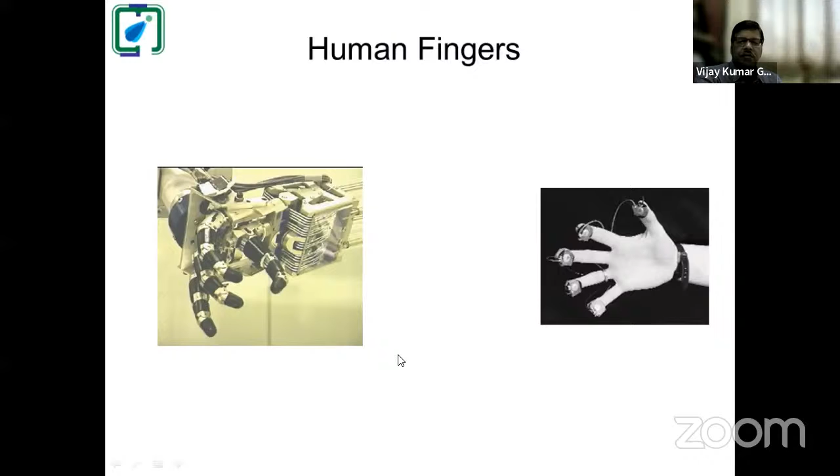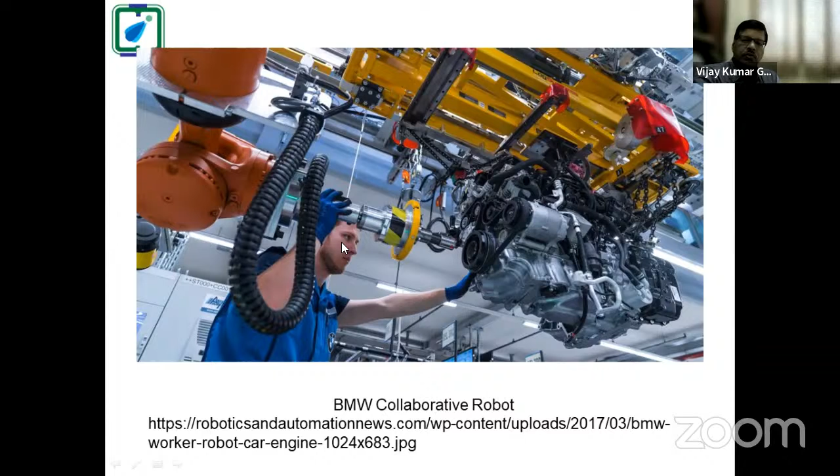And as I told you initially, in Industry 5.0, the focus is the interaction between human and machine. So this is an example of a BMW collaborative robot, where the robot is performing some task on this engine. The engine is being picked up, and this human is trying to perform the task with the help of this robot. So human and machine are both interacting, and they are performing the task.

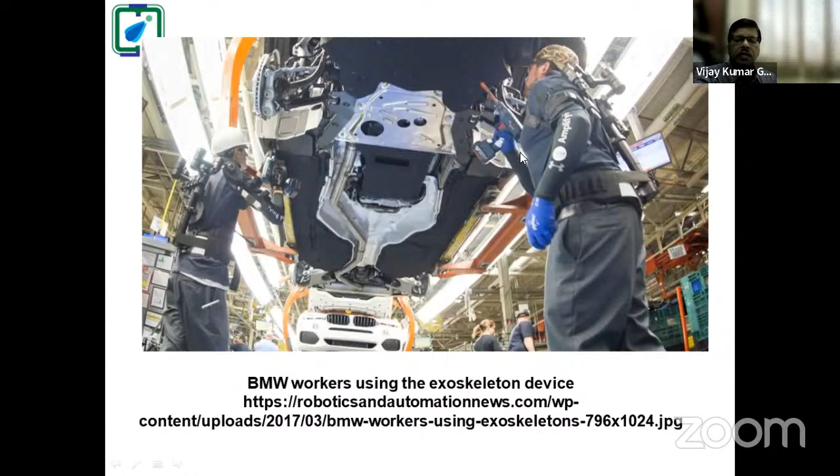This is another example. This is an assembly process. Some parts are picked and placed by the robot, and some parts are picked and placed by the human being. Right? And these workers are wearing exoskeleton devices to perform powerful tasks that human beings cannot do, but these machines can. There are many more examples, but I'll just try to summarize.

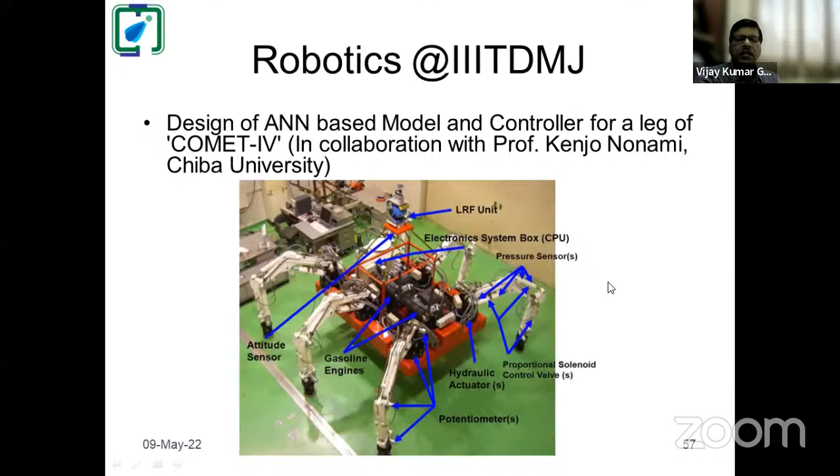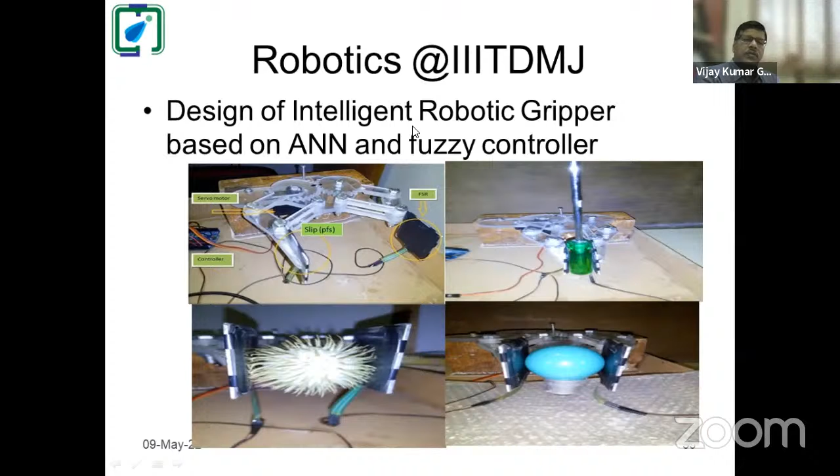So at IIIT DMJ, we are working in the direction of ANN and machine learning based robots. A manipulator I had already shown you. The multi-terrain robots I had also shown you. So it has been developed. These are some examples of grasping. Different objects can be grasped, even very soft, very brittle, or hard materials. This was based on ANN and fuzzy controllers.

Then the mobile robot direction, pervasive vision, brain controlled mobile robots, character animation using wave methods. These are the directions the research is going in. And now we are moving towards assistive and rehabilitation robotics. So some work is already going on.